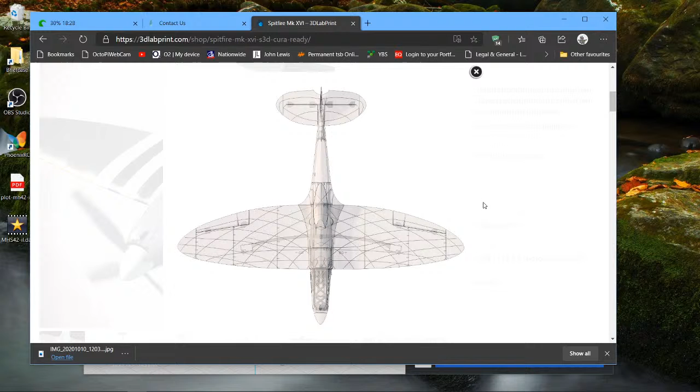That is a really high quality clear print. So I'm just starting to print mine, and hopefully I can get it to look equally as good as this one. I'm just doing the ailerons, the tail section, the fins, just getting my printer dialed in before I move on to the major components, because you have to sort of practice the thin wall printing.

There you go, 231 kilometers per hour, so it's pretty fast. So that's currently busy printing.

In fact, if I just bring up the OctoPi webcam, yeah, it's currently printing the tips for the elevator. So that's coming along nicely.

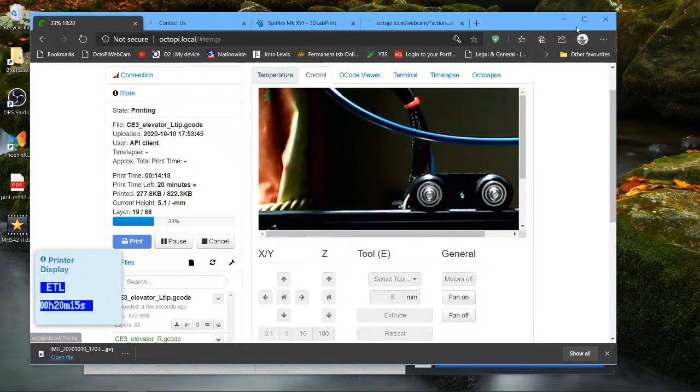I'm using about 200 on the head, 70 on the bed. I went through the INI files because they do provide the INI files, although because my printer's pretty much dialed in, I'm not importing them since they're old anyway, but they do give you some insights into the setup.

So you don't always have to import these, but what you can do is come into the slicer settings, Cura, and have a look inside them. For the elevator and aileron, for example, you can just open these and have a look. So you know your layer height's about 0.25, wall thickness 0.4, retraction true, temperature of the head, print speed 60, bed temperature 70.

That was interesting—that just means it gets better stiction, I suppose. I had a look through some of these settings, filament flow 102%. There are some good ones to look through here, and then mirror those in Cura.

So that's what I've done—I've basically mirrored them. The first thing I've done, which the Prusa slicer has, which I quite like, is the initial layer height. If you set that to 0.35 and set the initial layer width to 120%, that will give you a nice sticky, thick layer, but not too thick that you can't peel it off afterwards when you add your brim.

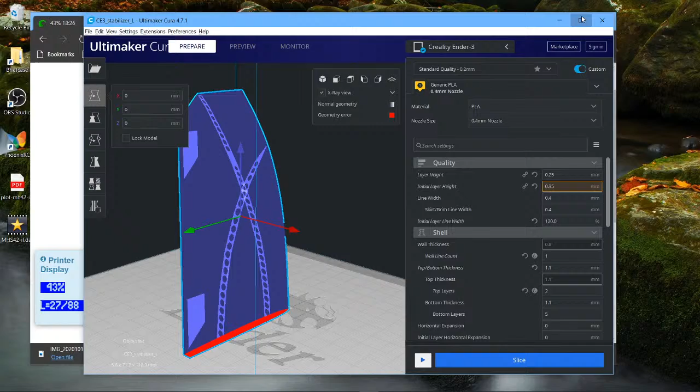One piece I'm printing is literally taking up a large section of this print bed—this is just a small tail section. The thing I like about Cura is the X-ray mode. It offers you that, and you can right click here—you've got mesh tools, and you can choose to check the mesh to see if it's okay. It said it may not print properly, so I can come down here and analyze the mesh.

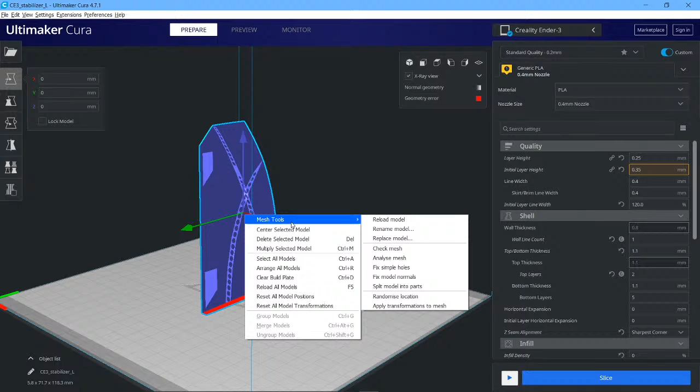And if I want, there's a repair option here from Netfab - rename, check mesh, analyze, fix simple holes, fix model normals, split model into parts. So you could fix simple holes, and that will go and do that.

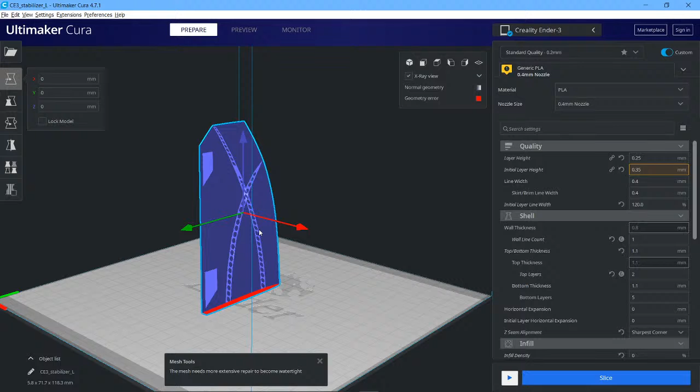So this mesh needs more extensive repair to become watertight. But I wouldn't worry too much about this, because of the nature of 3D Labs' prints - let's slice this and I'll show you what I mean. I've discussed this at length before. That's why they're always big on pushing Simplify 3D.

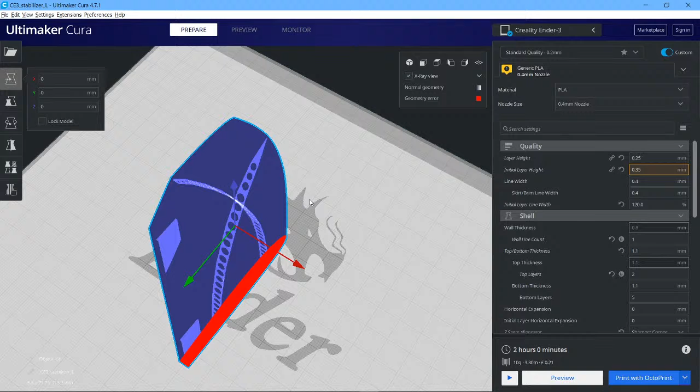But you don't need it. It works perfectly well in Cura. I've printed lots of models from 3D Labs in Cura. Doesn't work in Prusa Slicer predominantly, because these bits, the spars so to speak, are not meshed with the walls, and therefore they're seen as not part of a single model, and that's why it complains so much about getting these printed.

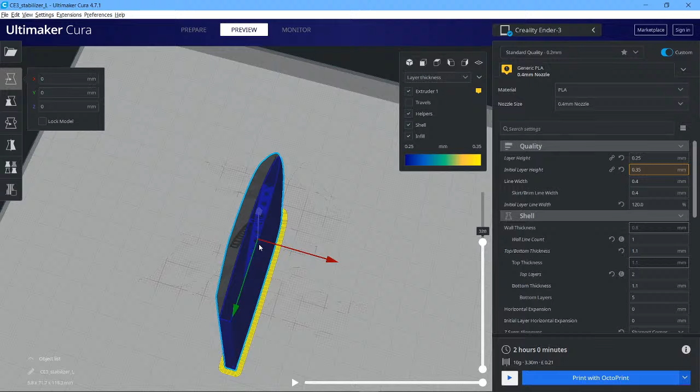But it's not too much of a problem. There are gaps between the rib and the wall, tiny, but because the material tends to blend in, it will typically weld itself up against the side wall. So it's not too much of a problem. The main problem I had in the initial 3D Labs is that there visibly were holes in the side walls, but they don't have that problem now. They seem to print out quite well.

They also recommend you turn the fan off, but my experience so far is it's better to leave the fan on. You can try it with the fan off and see how you get on. I might try it on the wings just to see. I tend to find the prints a bit cleaner, less blobby with the fan on than off. So there's two fans - one for the head and one for the tip. When you switch the fan on, you're switching the one cooling the tip always on.

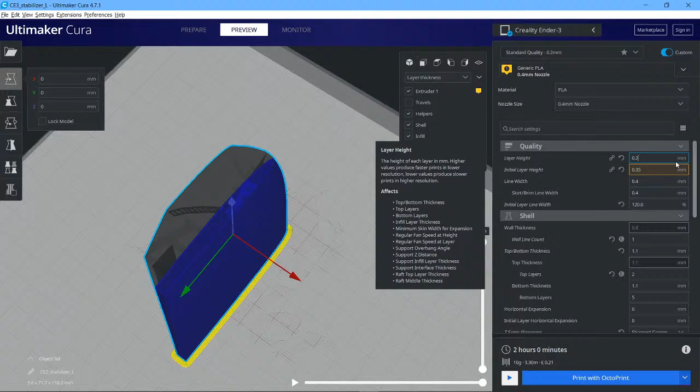So anyway, that slice - the reason this is dark is because we are down to 0.25. As you raise this up, say to 0.35, effectively the same as the initial layer, you will see that will change the color accordingly. So just go and slice this.

There you go. Yeah, it does this occasionally - you have to toggle it off and toggle it back on again. And I will turn off the auto slice feature in a minute once that's finished slicing. Okay, so there you go, that's finished processing the layers.

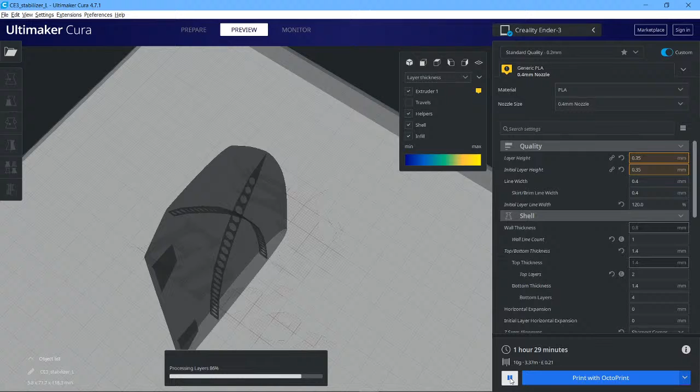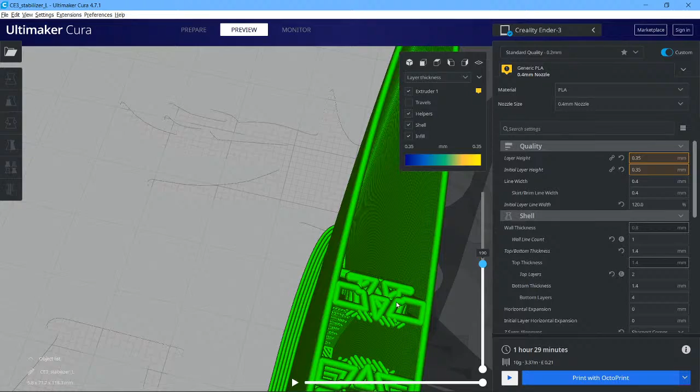So now I can see it's around here, but I just wanted to show you the inside so you can see, rather than in dark blue, how the layers are made up. And if you zoomed right in, sometimes you can see small gaps, but it's pretty hard to see because they are pretty good these days.

Yeah, so I'm going to toggle that back to 0.25, and reslice that. Hope that'll work. Sometimes Cura needs a little bit of jostling. Try that again. There you go. Right.

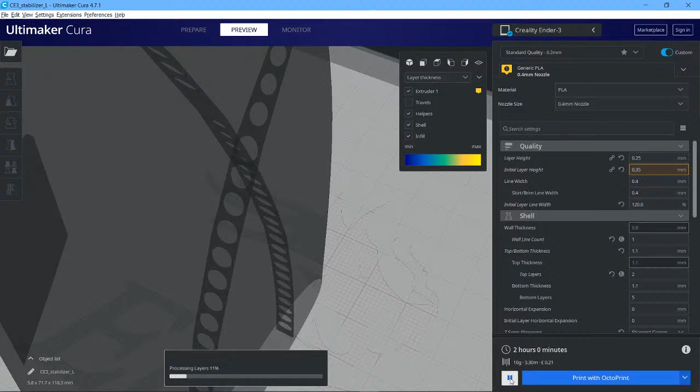Right, so that's done. And I'm using all the usual temperatures. I've got some top layers going in here. I don't really need any bottom layers, so I'm going to set that to 0, come to think of it. But I do need some top layers. I was doing some tips, that's why I had the top layers, and I was doing some ailerons and the like.

Your slicing tolerance must be set to exclusive. Your brim, it's up to you how thick - I've set mine to 5, so I have a nice thick brim to stop the warping. And as previously mentioned, I've set the first layer line width to 120% and 0.35 for the initial layer. Now it creates a nice, thick, sticky layer.

And I think you can also play with the speed to do with the initial layer. And if you type in initial - I think I did set that to a slightly different value, so here we are. You set your initial layer speed to 20 millimeters per second.

Skirt brim - that slows it down a little bit, so you get a nice, slowly applied, thick layer. You can glean these settings either by looking at the INI file, but mostly the Prusa slicer is very good in this respect. It's a shame that I can't print these parts in Prusa slicer, but it just won't handle it at all.

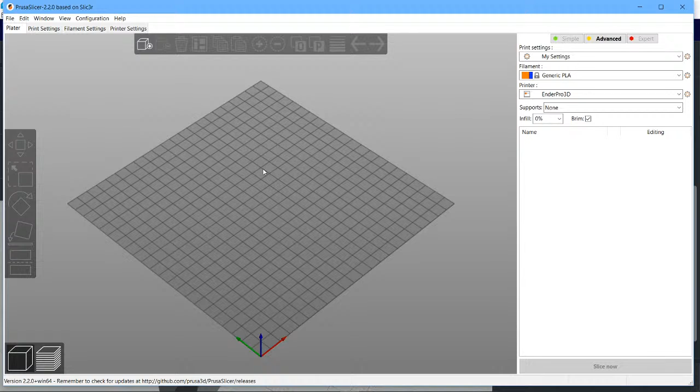It has these settings in there, so you can kind of plagiarize between the Prusa slicer and the Cura slicer. I'll try and open it up - I'm pretty certain, but we'll give it a go, see if it'll accept this part. But most parts, if you split it into objects, it'll just fall to the bottom and then they don't align properly. So you kind of have to grin and bear it with Prusa slicer. Let's have a look.

So if I go to SD3 files and I went to the ailerons, etc. Hang on a minute, I think I'm in the wrong directory. Yeah, not 3D files, sorry. Let's go - I think I was in the right folder. S3D, STL, that's what I want. And I want ailerons, etc. Do I want project files? Oh, I pressed the wrong key - Control I. I pressed Control O because that's what you do in Cura.

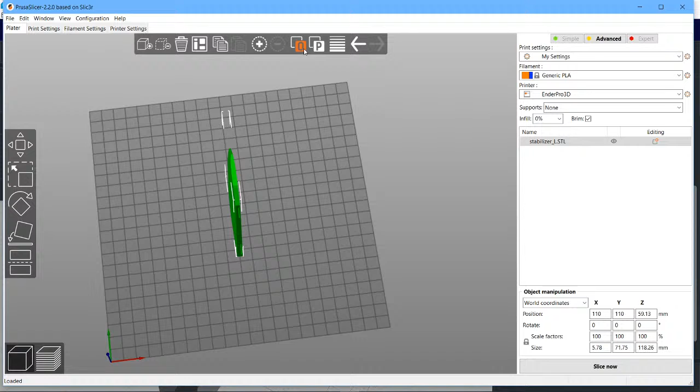For stabilizer left, which is the same part - try and split it into objects, because usually that can get it to work. Already, look, it's saying there are problems with the model settings because of them not being attached. But I don't think, if I just go for this one, this is going to work. We'll give it a shot, but I don't think it's going to work.

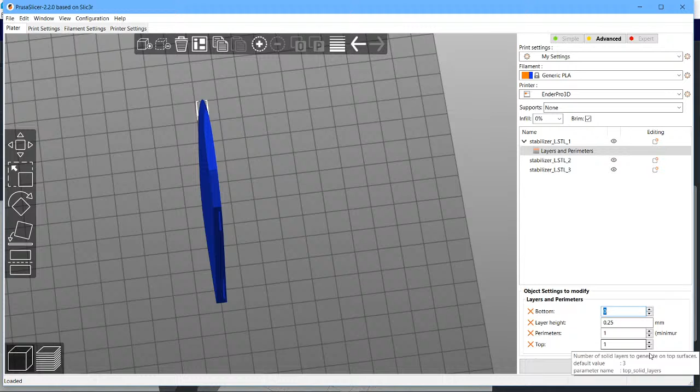So it's one wall thickness. I don't want a bottom layer, I do want a top layer, probably of 2. I don't need any infill. And yeah, it won't work - that's because it'll just be hollow.

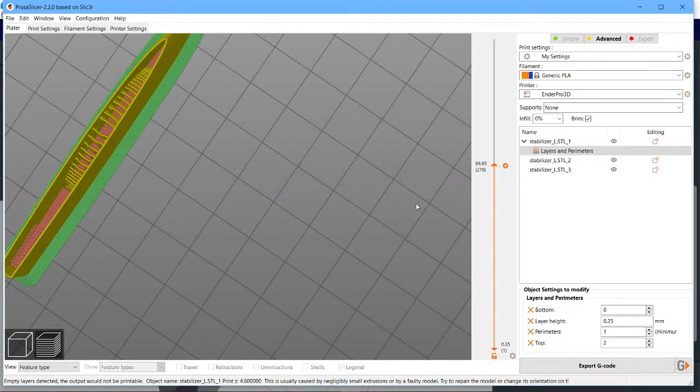Oh no, I did get it. That's interesting - sometimes it works, but then it's all very stringy, look. Not sure that's going to work, and they're probably falling into the wrong place, I reckon. Anyway, it won't print because it's already started complaining about it.

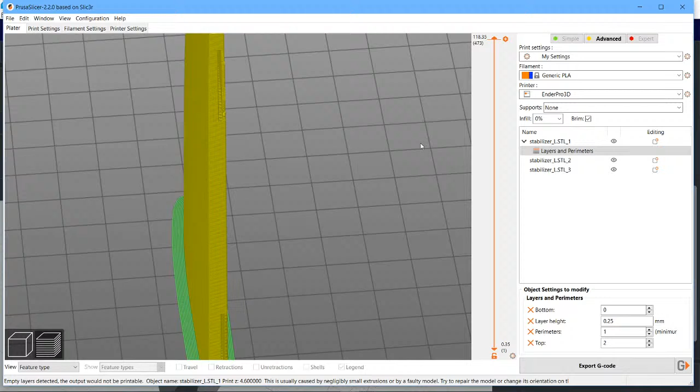And there I can see, look, there's some issues, you see. Yeah, so it's not going to print clean, that. Yeah, you can see here it's not happy either. So whereas in Cura - but anyway, coming back to the print settings and the filament settings.

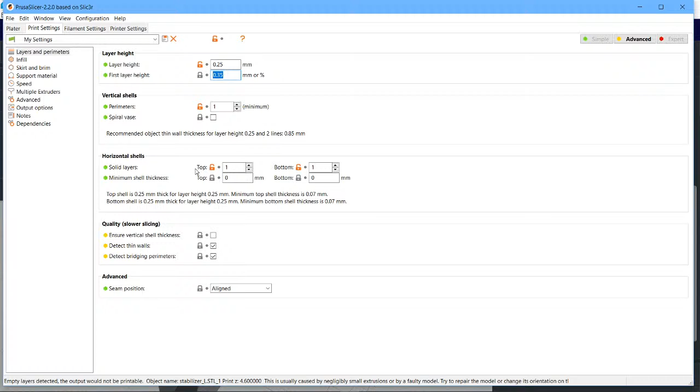Filament maybe under advanced, actually print settings, layer, skirt and brim, layer and perimeters. This is where you find this first layer of 0.35, and you will find the settings in here anyway. So that's how I've managed to glean information to get these the way that I want them.

Because once you start doing thin wall printing, you will find it will warp on the corners. Typically it will warp, especially on the bigger parts. So you're going to slice that one up and then have a good look at it.

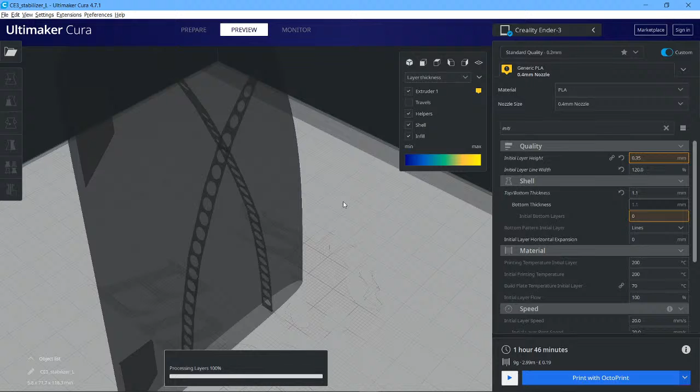But they are brilliantly designed, these parts. They're really light, single wall, thin wall printing, and they've got lovely architecture inside. And they come out really strong as well with this kind of architecture. So they really are aircraft grade in terms of lightness and strength. And providing your printer is dialed in correctly, it will vertically come up smooth without any problems.

You should be able to get a nice vertical wall here without any blemishes. Never switch the fan off midstream, by the way, because you will find it will start oozing and create a lump or a zaggy, as I call it, where it'll just change its texture. So always leave the fan on or off, one of the two, but never switch it off once it's started printing, because it will definitely change the material flow and the way that it lays out the material in alignment.

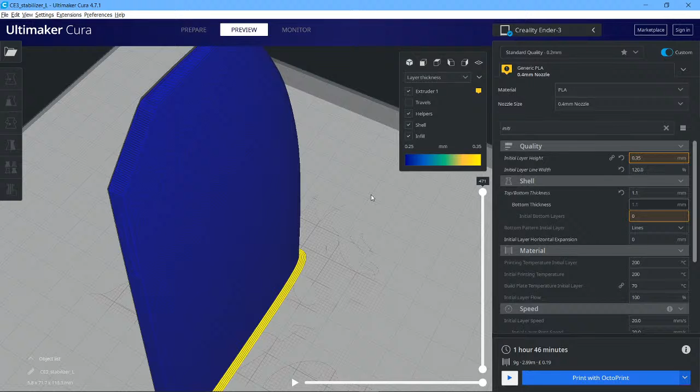So that's ready to print. Good luck - I'll let you know how I get on with this Spitfire. I'm really looking forward to getting this one in the air. I've still got a P51 to get in the air soon - it's pretty much finished, but I had to build another thicker version of it because it wasn't really strong enough.